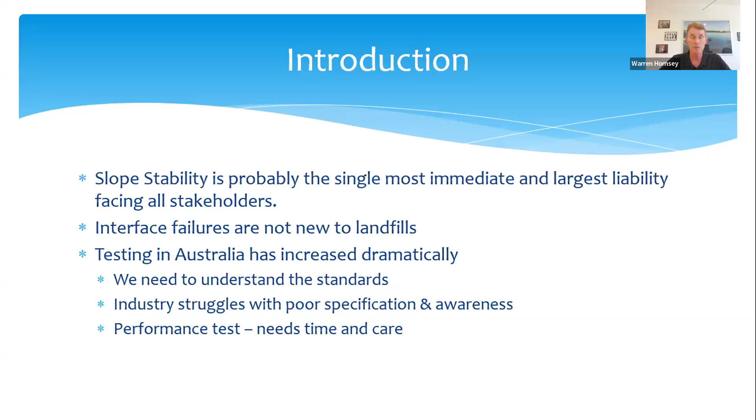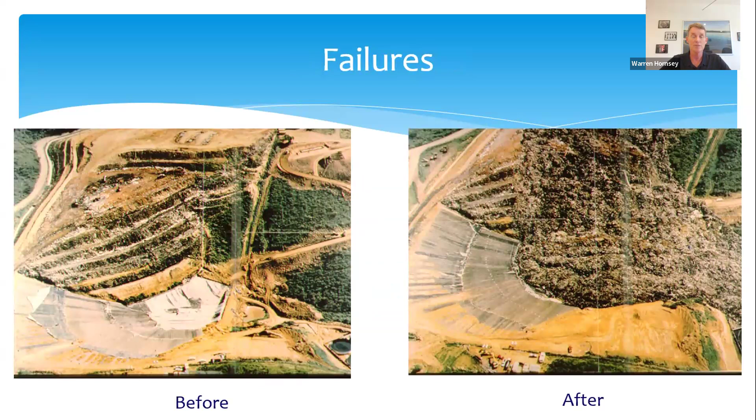So, talking about landfill failures, this is kind of the dramatic outcome that nobody really wants to see - these slips either through the waste onto your cell, or in this case of different components within the liner system sliding down the slope.

Like I said, this is nothing new, and I was actually out on a site on Tuesday having a look at a similar failure that occurred in the Brisbane area. So it continues despite us doing lots of testing.

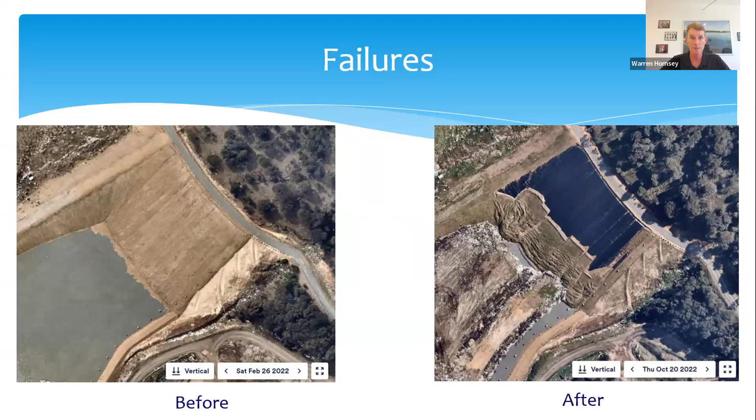So what do we need for this sort of testing? Essentially, for geosynthetic testing, you need large shear boxes - 300 by 300 millimeter shear boxes, not your 75 or 50 millimeter shear boxes that you use for soil testing. These are specialized pieces of equipment with special adaptations that go beyond what a normal soil testing apparatus would do.

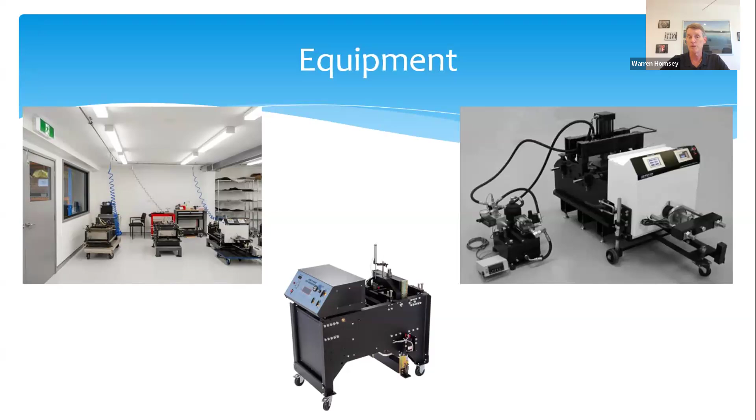And because of the large area, we're talking about large loads, and those loads are applied either through hydraulic rams or applied by air pressure. So it really depends on what equipment you've got.

Essentially what we're doing is applying a normal load or a vertical load on the specimen, and then applying a horizontal shear stress. From that, we can work out what the friction angle is and get an indication of the forces that are involved in or transferred through these materials as you fill up or build the landfill.

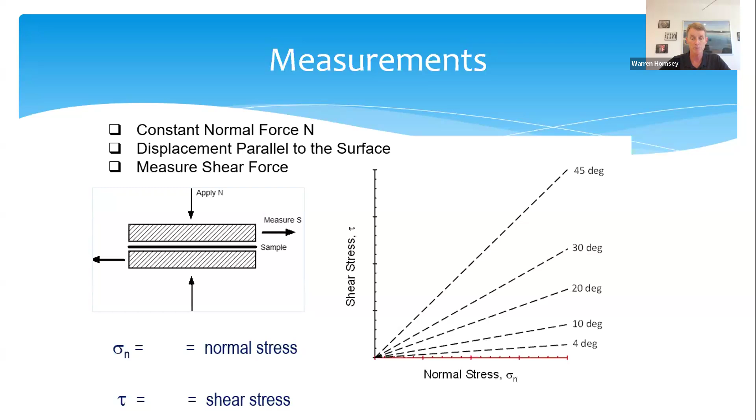So what we're going to go through today is the 3 key standards involved in interface friction testing with geosynthetics. First is ASTM D7702, which is really a guide on what you should be considering when doing interface friction testing. If you're a designer, you really should get a copy of this standard, go through it, read it, and make sure you understand what it's all about.

There's a lot of information in there, and while some of it may not be useful for you, there is a lot of information that can be really helpful. I'll go through a few key aspects of that today.

The next one is ASTM D5321, which is for doing geosynthetics versus soils, or geosynthetics versus geosynthetics. Then there's ASTM D6243, which is essentially the same as 5321, however it works mainly with, well, it is for GCL specific interfaces.

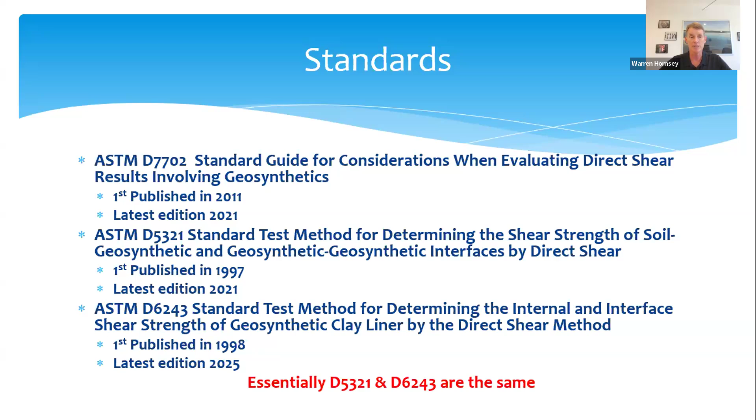So whenever there's a geosynthetic clay liner involved in interface friction, a GCL involved in the shear profile, then you should be using 6243. The standards themselves are very similar, as you'll see - it really is just some of the setup details that are different in 6243.

In terms of D7702, the standard - well it's not really a standard, it's just a guidance document. When we say standard, it means it's been approved through the ASTM process. It's a summary of information that was available at the time of publication. It's intended to assist designers, and it's not intended to replace educational experience.

And these are all the disclaimers associated with the standard itself. One of the key areas references a few people within that standard: Thiel, Gilbert, Koerner, and Stark, and there's some documents and correspondence I have with those people that I'm going to show later on when we go through a case study.

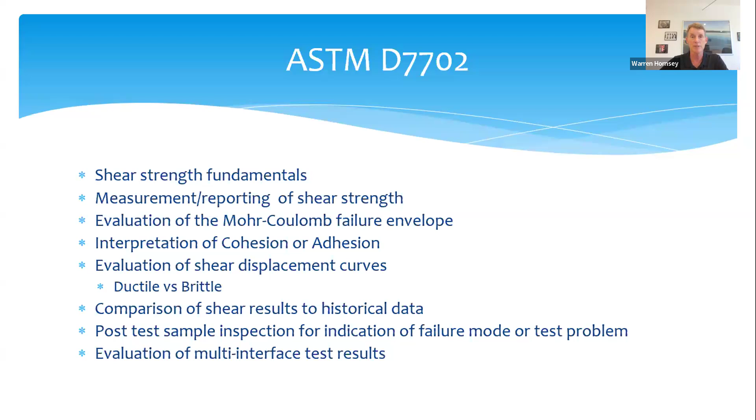So it goes through what the shear strength fundamentals are, evaluation of Mohr-Coulomb envelopes, comparing shear results with historical data, and evaluating multi-interface test results. All of these sorts of things are covered in D7702.

Like I said, it's a very useful standard, and I would recommend everybody that's getting involved in shear testing get a copy of that standard.

The next one is ASTM D5321, which is the testing method - this goes down to how you should test these materials. And I spoke about the 300 millimeter shear boxes - these are the requirements of the standard.

Within that, they talk about shear displacement rates, displacement indicators showing that you need at least 75 mils of shear when testing, and how you clamp those materials in place to make sure they're forced to shear along the interface you want it to shear, not that it shears on the gripping plates along the way.

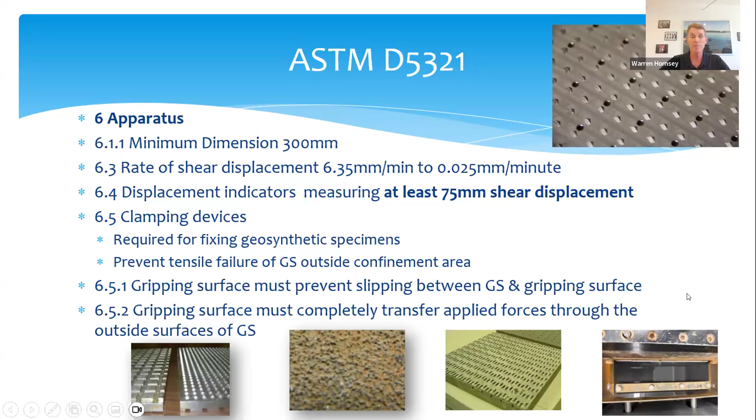And then over here is just the clamping devices for the geosynthetics themselves, while gripped underneath here is a secondary clamping to hold the samples in position. So the standard talks about them, but doesn't give you guidance on what you should be using.

Again, in terms of conditioning, the standard talks about being aware of the conditioning of your samples. It talks about the time those samples should condition, but it doesn't give you any guidance. It doesn't tell you to do it 1 hour, 24 hours, 48 hours. Those are engineer specific or site specific.

The same with confining pressures and normal stresses and shear rates. It doesn't give you too much information on it because each one of those things is project specific, and design engineers really need to think about what they should be doing.

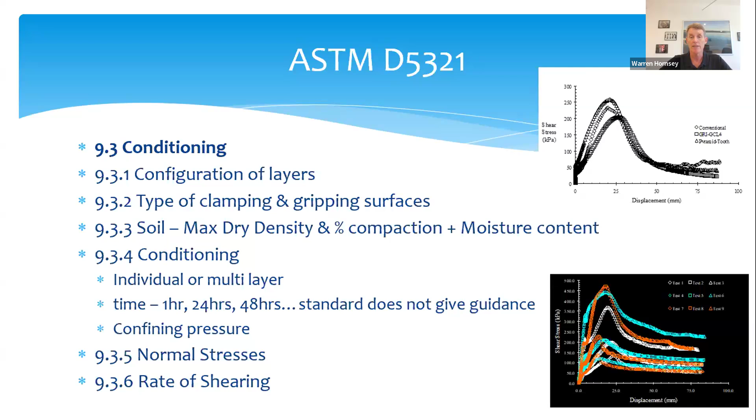So in terms of normal stresses, I see this quite often. We see capping designs with 200 kPa confining pressures being specified and things like that, which is really unrealistic for a capping design. So from a design engineer perspective, you really need to think about what your loads are that you're going to be applying during construction and how that will affect your interface friction testing.

So there's procedures that you would follow if you were doing geosynthetic versus geosynthetic, say a geocomposite against a geomembrane. They talk about how you'd assemble the layers and so on.

Now, in terms of applying the shear speed or shear force, if there's no instructions, the standard says 5 millimeters per minute. Well, in all reality, I haven't seen any shear being carried out at 5 millimeters per minute here in Australia. Having said that, in the US, it seems to be the norm with, say, a geomembrane versus geocomposite or a geotextile versus a geomembrane, those sort of things. So that's where that becomes interesting. But in Australia, we don't see anything faster than 1 millimeter per minute, and I think the small gain you get from running at 5 millimeters per minute is negligible.

The standard requires you to run to 75 millimeters. However, there's a note that allows you to stop the test once steady state is achieved, and I'll go into that again because it's quite important. I've gone into this in a bit of detail at the end of the presentation in the case study.

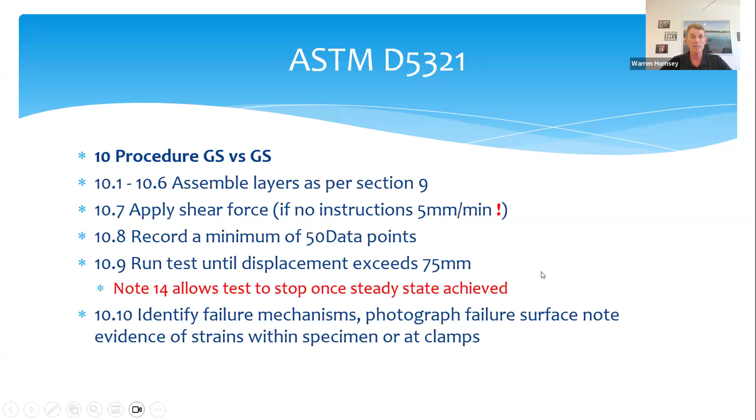And then there's requirements of identifying failure mechanisms, photographs of failure surfaces and so on, and whether the failures happen within the specimen or at the clamps and so on. So it's quite detailed in terms of what is required or what should be reported.

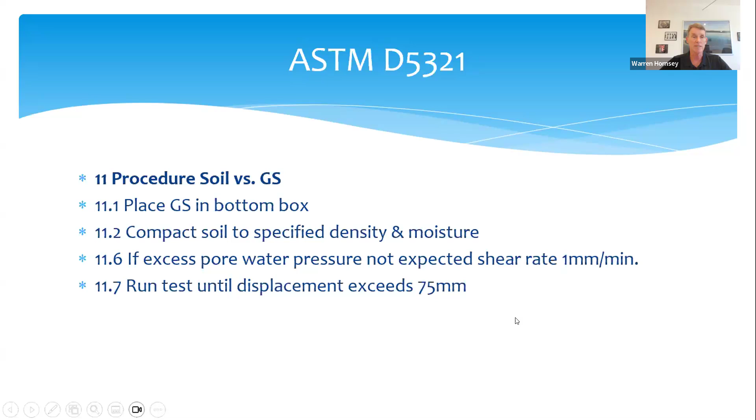Now, much of these procedures are very similar, other than, say, soils, where you have to know what the compaction of your soil is, and what the density and moisture content is going to be. And then there's some guidance in terms of what the excess pore water pressure, what speed you should run on.

In terms of reporting, it's really detailed in terms of what should be reported and what you should be expecting when you see results come in from the shear testing. It really needs description of the specimen. So if you're using grade X GCL, you need to describe what the grade of geotextile or GCL it is, because that grade could have an effect on the outcomes of your testing.

So if you look at this graph over here, you can see this is a GCL against the geomembrane, and in this case, we're getting internal failure of the GCL. And this may not happen if you have a different grade GCL.

So it's really important, these are standard requirements of what's required in the standard in terms of plots of shear force versus displacement, shear stress versus normal loads, standard sort of tests, but are not always provided to clients for them to assess.

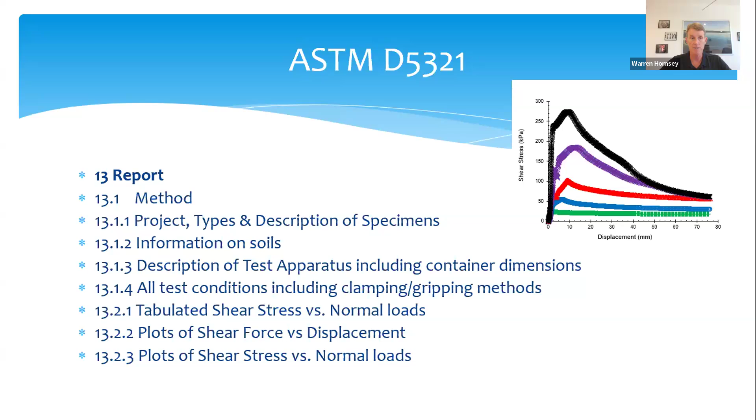So in terms of what the laboratory should be supplying you is the friction angle that you would expect out of those materials, secant friction angle, so the angle is if you took the line through zero cohesion, and then the mode of failure.

You don't always get this from a lab unless you ask for photographs, but the lab should be taking photographs of all their interfaces.

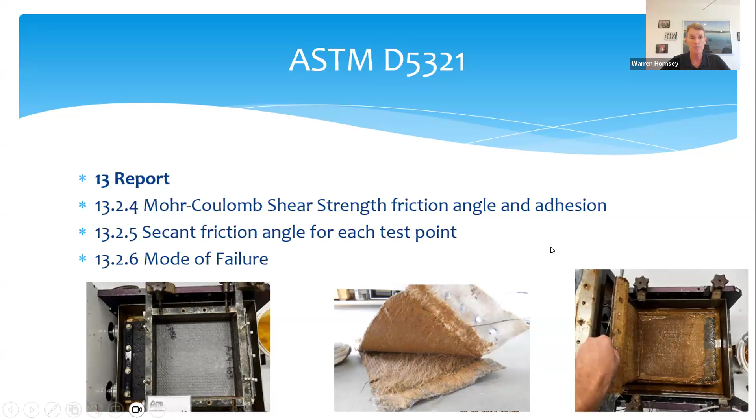So next one is 6243. Again, same sort of setup, same machines. But here we're talking about displacement rates of between 6.35 millimeters per minute down to 0.025 millimeter per minute shears.

And that really has to do with whether excess pore water pressure is building up in the specimens during the shearing.

The key again is preventing tensile failure of the geosynthetic outside of the confinement area. So we confine it within a 300 by 300 millimeter area, and that's where you want the failure to happen. You don't want the geomembrane going into tension around the clamps on the outside of the sample.

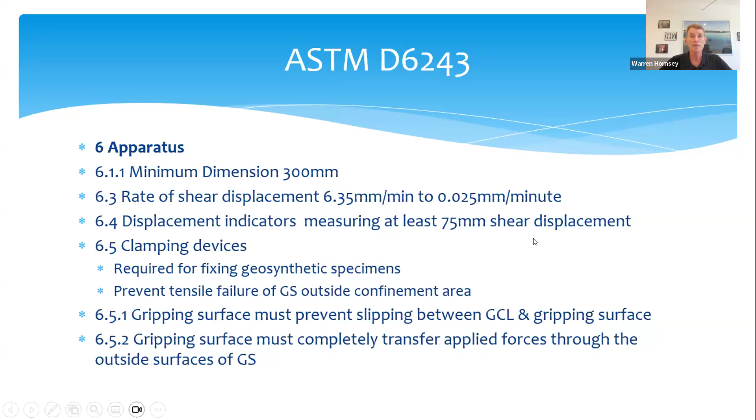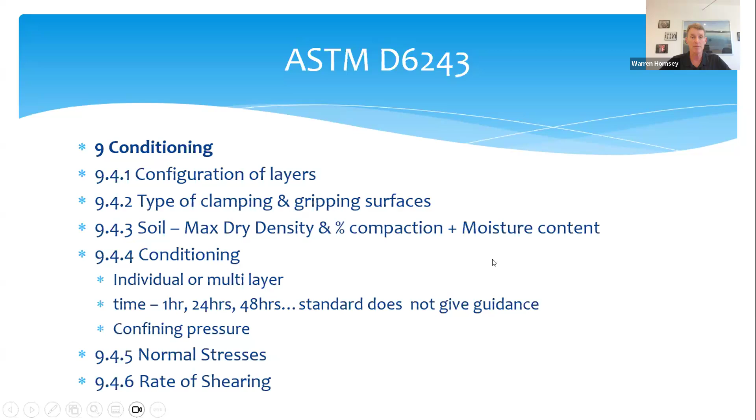Again, it's much the same as the 5321, same setup in terms of conditioning, although once again there's no guidance, just saying you have to consider this, and define what that requirement is for your testing facility.

This standard goes a little bit more into detail in terms of applying the shear force. They're talking about 1 millimeter per minute for interface shear strength and 0.1 for internal shear strength.

Now, I don't really agree with that, to be honest. If you're going at 0.1 millimeter per minute for internal shear, you should apply the same thought process to the interface friction testing. I think you'd struggle to justify running a GCL against another interface, say a geomembrane, where you can't release pore water pressures, at 1 millimeter per minute when testing.

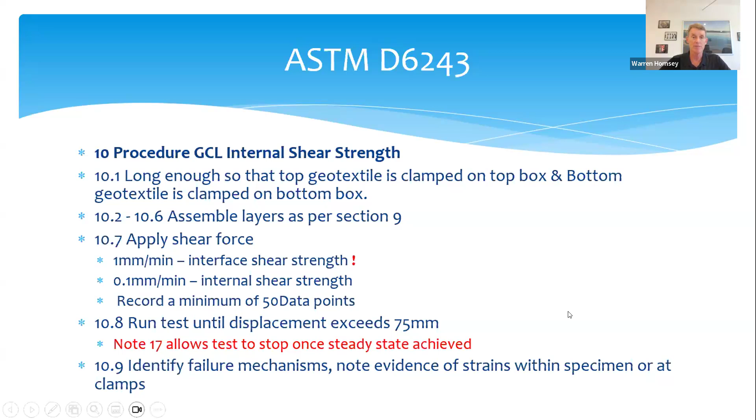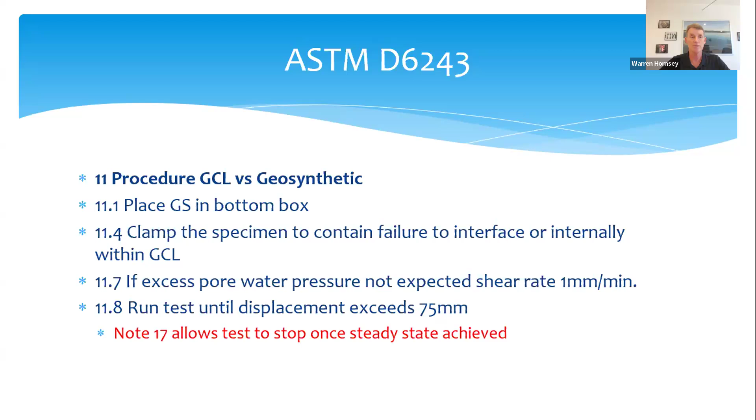But again, it shows the failure mechanisms and so on along the way. They talk about the different interfaces, so the procedures in terms of setting up the GCL versus geosynthetics and so on. There's a little bit of detail in terms of how that should be set up.

And this is something you should be transferring over to your laboratory that's doing the test. There's details. So if you're doing GCLs versus soil, and you place the GCL in the bottom box, that's okay if your GCL is not prehydrated.

But the moment you prehydrate your GCL, and we see this regularly, the GCL becomes very plastic, or the clay within it becomes very plastic, almost turning into a toothpaste where you can squeeze it between your fingers. So if you compact on that, you could be squeezing all the clay out of the GCL, and then you're not testing the true performance of the GCL. So you have to be careful of that.

So while the standard gives guidance, think about what you're doing in terms of the way it's going to be set up and so on.

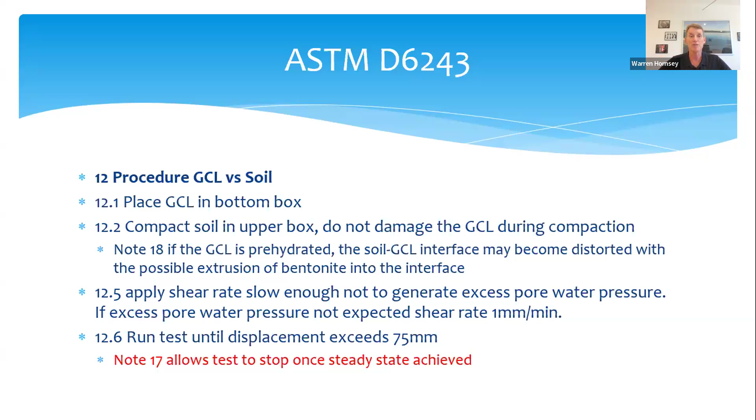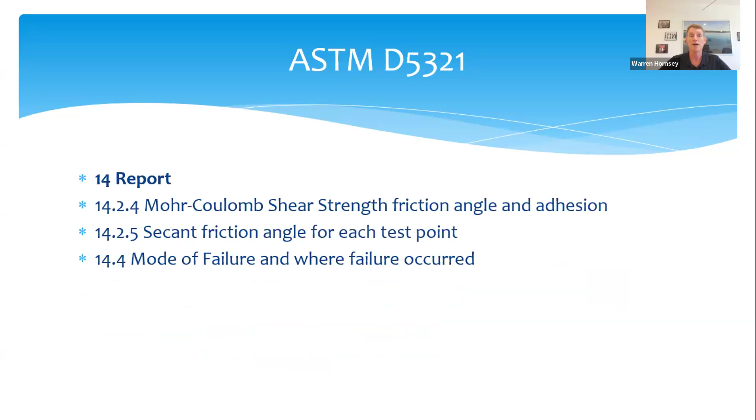The reporting is exactly the same as 5321. There's no difference, they're really asking for the same processes. So I haven't added more photos into these things because it really is the same.

What the standard does have is a checklist in terms of what you should be supplying to your laboratory for testing purposes. So I'd say you should get a copy of each of those standards, and when you set up your test requests, at least confirm you're ticking off this checklist in terms of what needs to be done for the testing.

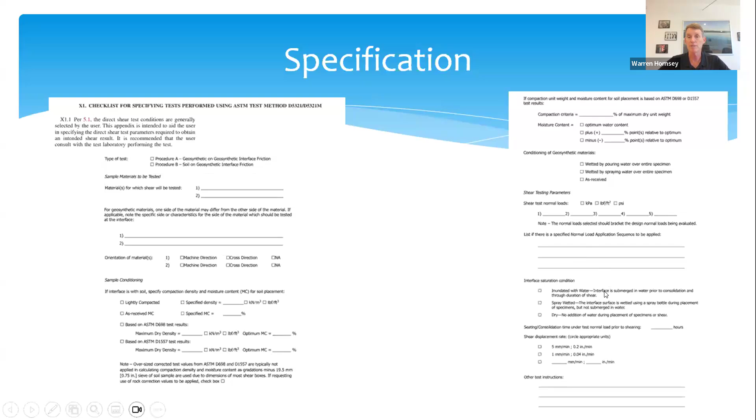So your specification should be covering all these items that are listed in the standard. The specification is the design engineer's responsibility, and really the setup of the test program should be the designer's responsibility.

Don't leave it up to the CQA person on site to make that call. While it might be them that has to see if it passes or fails, they should not be the ones deciding how those materials are set up in the test.

And you really need a justification if you deviate from the standard, particularly if things go wrong. When things go wrong and material starts sliding down the hill, if you deviated from what the standard says, you need to have some sort of justification as to why that would be.

Because from my experience, when lawyers get a hold of something and get involved in projects like this, it doesn't matter whether it's right or wrong. It's whether you followed the standard or not. And if you haven't justified why you deviated from the standard, then you've almost assumed responsibility, or certainly co-responsibility, for any sort of failure that is out there.

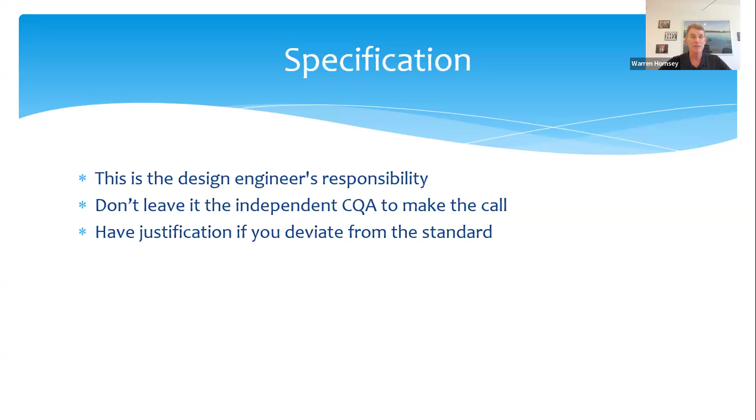So in terms of specification and testing, number one, make sure the laboratory is testing the correct material. It's no good asking the laboratory if they've got some clays that they think will suit your site.

That's extremely dangerous. Clays are so variable, and we see big differences in plasticity index and particle size distribution of some of these clays. Some of them have sandy materials in them - the materials out of WA have a lot of sand in them, whereas some of the sites we see around Melbourne and so on are highly plastic, very fine, very slippery clays. So substituting clays is extremely dangerous.

Geomembranes - we all like to think all geomembranes are the same, but there is a difference between blown film and flat die textured geomembranes.

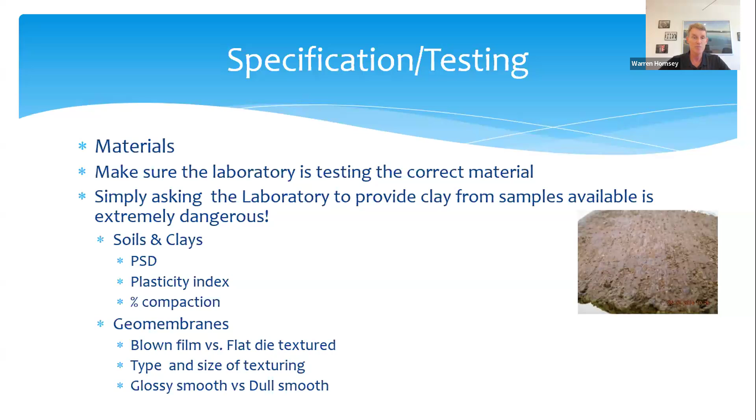When we talk about textured geomembranes, it gets even more complex because we have blown film, spray textured, which I haven't got a photograph of, and flat die texturing, with the little indents or bumps on the geomembrane changing shape, size, and spacing. All of those characteristics will influence your shear results.

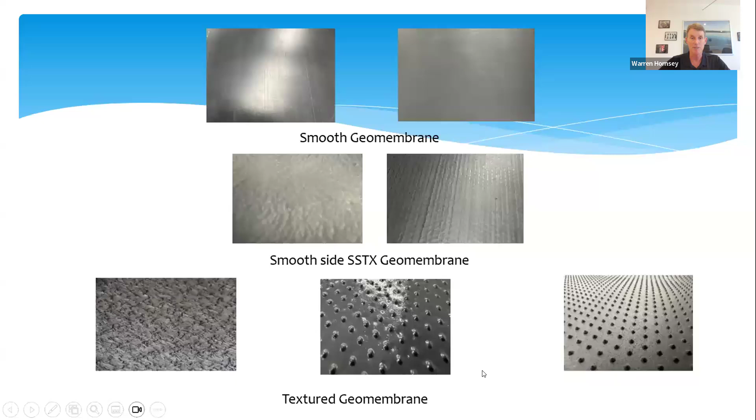So if you plan on using a certain material, don't substitute somebody else's material just because it's easy to get hold of. In terms of GCLs, clay impregnation of the upper geotextile, the one facing whatever you're shearing, can have an impact.

Heat setting of the GCL - is it heat set, and how well is it heat set?

Peel strength of the GCLs absolutely makes a difference to the peak shear values you get under high confining pressures - not so important under low confining pressures, but certainly under high confining pressures. The peel strength of that GCL will influence the friction angles you get out of the system. And then any coatings you may or may not have on that GCL.

We did a job a few years ago in Papua New Guinea where a plastic coating was placed on, attached to the GCL. It was probably a bit of a slip of the tongue, but in my opinion it was placed on the GCL rather than attached to the GCL.

So the failure plane became the coating, or the attachment of the coating to the GCL. Be aware of those sort of things.

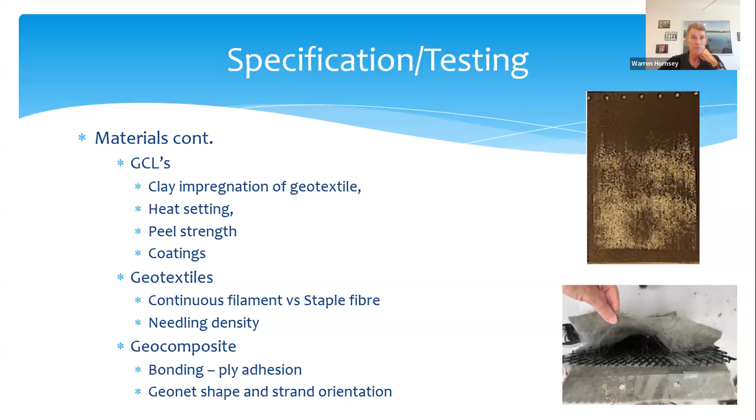Because if you leave the area that goes up into the clamped areas bonded, the tensile strength within that area can influence the shear results and overstate your shear values, because you're putting tension into the whole structure. So we'd always recommend that only the area under the confining pressure is bonded.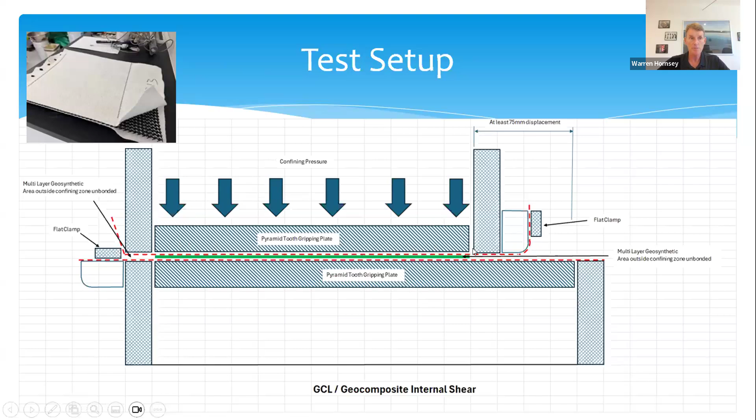The same goes when we're going GCL or geocomposite against a geomembrane, that we would peel back the composite section so that only the section that's under confinement is bonded and the rest is free to shear.

The geomembrane is clamped at the back, and the GCL, the top geotextile of the GCL, is clamped in the front. You can see the clamp there, sitting through there to hold the sample in position. So these are the sort of things that you have to think about when you're doing your test requests that you send through to the laboratories, because they can have an influence on the outcomes.

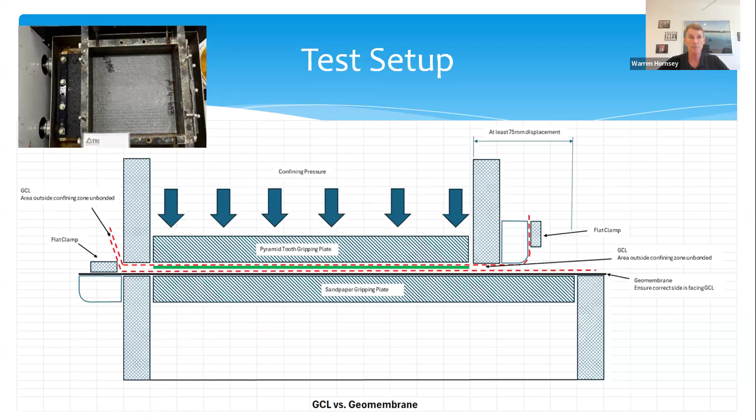One of the key areas that I see in this, we're seeing more and more geogrids being included into particularly veneer stability, landfill cap designs. And often we see there is no clamping of the geogrid in the layer work, so the geogrid is free to slide along with the material.

The problem with that is that you are not really measuring that shear force. You're not measuring the real forces that are going into your geogrid, and you could be underestimating your forces. Why that's a problem is that you can underestimate the anchorage required for your geogrid, and you could have pull-out failure of your geogrid, and the whole structure could slide down the slope because of that.

So think carefully when you're doing these geogrid inclusions in terms of what is happening on site and how that interaction is going to happen. It's no good having a geogrid floating in the shear box if it's not floating on site. If it's anchored in a trench and it's designed to be a reinforcement, it should be anchored in the shear box to replicate the same thing happening there.

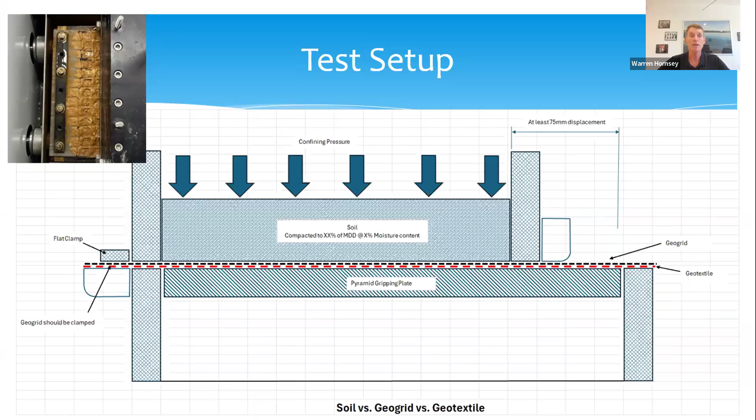In terms of testing, you've got to think about what the hydration requirements are that you're having, and these are typical hydration periods that we see. I'd say that's probably not 96 hours - it's not typical, but we have done testing, hydration or consolidation for 96 hours.

Step loading, we see in some applications, but you need to be aware that this adds time to the testing. And then once you've done step loading, do you shear immediately afterwards, after you've reached the 500, say, kPa, or do you hold it for a period of time - 16 hours, 24 hours, whatever it is.

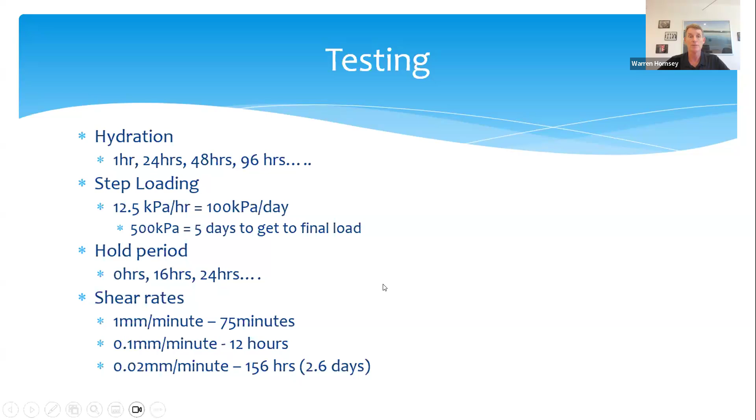In terms of your shear rates, what are you specifying and how quickly can these tests be turned around? So 1 millimeter per minute is 75 minutes, just over an hour for a test. 0.1 millimeter per minute, that's 12 hours of shearing. 0.02 millimeters per minute, you're talking about 2.6 days of shearing to get that. So just be aware of that.

This is an example of a project that I'm quoting right now. You can see that we've got 3 confining pressures. We have to have 48 hours of hydration, step loading at 12.5 kPa an hour and 0.1 millimeter per minute, and we have to do that 3 times. So essentially, we will have 1 shear box tied up for almost 3 months doing something like this. That's fine, we can do it, but there's no way of speeding these tests up - then you're waiting 3 months for results.

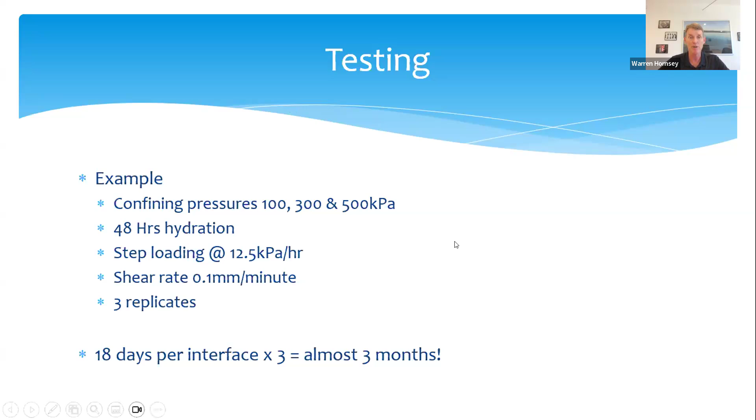In terms of understanding the results, what you should be getting as per the standards are what the specimen is, what the normal load is, or normal stress that you've applied to the specimen - so 50, 100 to 320 kPa - the shear stress, the peak shear stress that was recorded, the large displacement shear stresses that are recorded, and then we're looking at the friction angle, for both peak friction angle and the large displacement friction angle. So that's what you should be seeing in a report, at the very least.

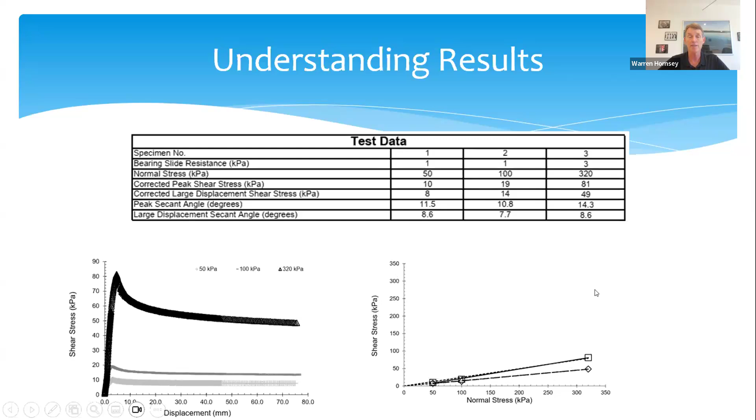It's important that you as design engineers or CQAs understand that all these materials have a fingerprint, for want of a better word, in terms of how they would behave, depending on what materials are being sheared, whether it's smooth geomembrane against geotextile or textured geomembrane against GCL and so on.

One thing's really important to understand is that all of these materials need some movement between them in order to take up that force - it's not an instantaneous force transfer. Smooth geomembrane is probably the only thing that's instantaneous because the forces are so low and there's no gripping or interlock required between anything. But as soon as you use textured geomembranes, it takes a while for those materials in contact with the textured geomembrane to lock into that texturing and then take up some sort of tensile force within that application.

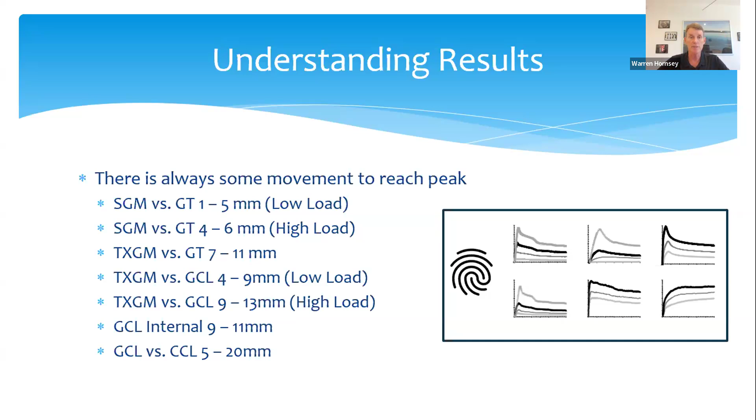So when you're getting results, have a look at them and say, does that look reasonable for a textured geomembrane against a GCL or whatever the case may be? We can certainly give you some guidance on that, and there are some examples that can be shown for those sort of materials.

Things like internal shearing of GCLs or geosynthetics - GCLs, if fully hydrated, will normally fail internally at confining pressures greater than 150 kPa. It depends on the grade, but at low confining pressure of 100 kPa, the GCL shears against the textured geomembrane, giving reasonably high large displacement shear stress. At 300 kPa we get a peak, but at this peak the GCL has failed internally, so at large displacement it's much lower than what we saw at 100 kPa.

The same goes for 500 kPa. If we continue these shear stresses out to 300 millimeters, these numbers would converge, and you get essentially the friction angle of a sodium bentonite, which is anywhere between 3 and 4 degrees - very small.

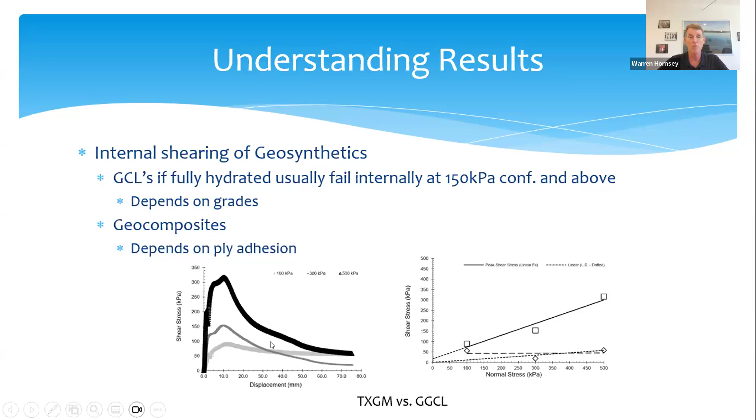In this case, with the shear stress at higher confining pressures being less, what we get is a negative slope, which can't be real - that's just a theoretical number. We would force the tangent through zero so that you've got a more realistic large displacement friction angle. Your laboratory should be telling you that's what they've done when testing, and you should be checking that this is occurring along the way.

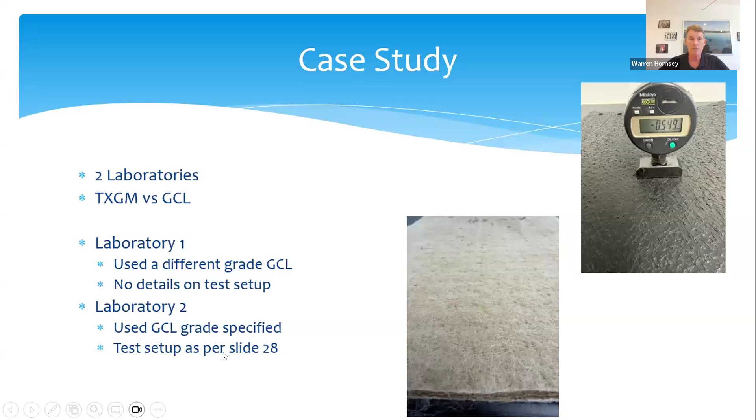As a final test - and I'm running a bit over time - there's a quick case study. Two laboratories carried out testing on the textured geomembrane versus the GCL. Laboratory 1 used a different grade of GCL: grade X was specified, but they used grade Y for testing. Laboratory 2 used the GCL as specified, set up as per slide 28 - you can go back and look at that. What you see here is the differences in the shear stress versus displacement.

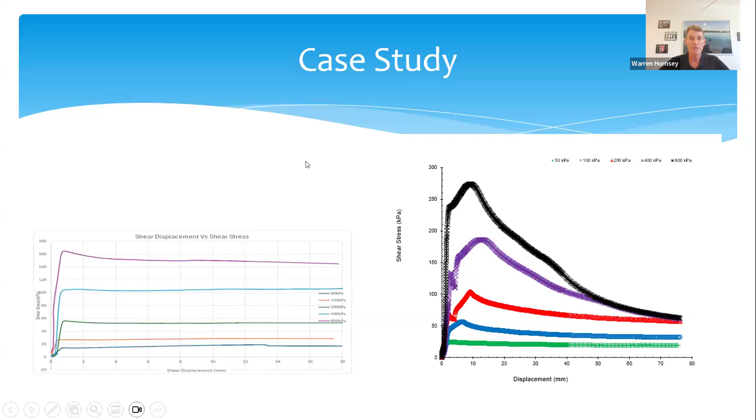With laboratory 1, at 600 kPa we're getting just over 160 kPa shear stress, whereas laboratory 2 is getting up to 270 kPa shear stress for supposedly the same interfaces. That set off alarm bells with the design engineer, hence the comparison that was carried out.

What you can see is that the lab 1 stress-displacement curve looks a lot like a smooth geomembrane versus geotextile - not quite, but pretty close. The displacement was only 18 millimeters, and there was no internal failure above 150 kPa, so there's some questions over how the material was clamped and so on.

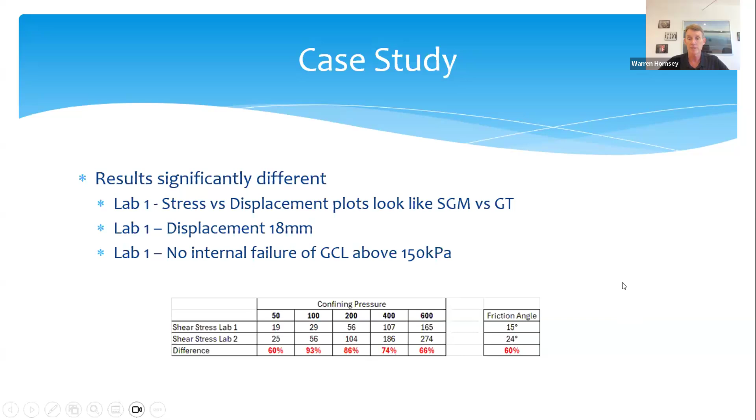In terms of the differences, the shear stresses for each of the confining pressures show up to 93% difference - a huge difference in the results - and in friction angle, around 60% difference.

We can drill into that even more and look at why that was stopped at 18 millimeters. As I highlighted in the previous presentation, this test may be stopped sooner if the shear forces have reached steady state - that's in both standards - but there's no definition in the standard of what is classified as steady state.

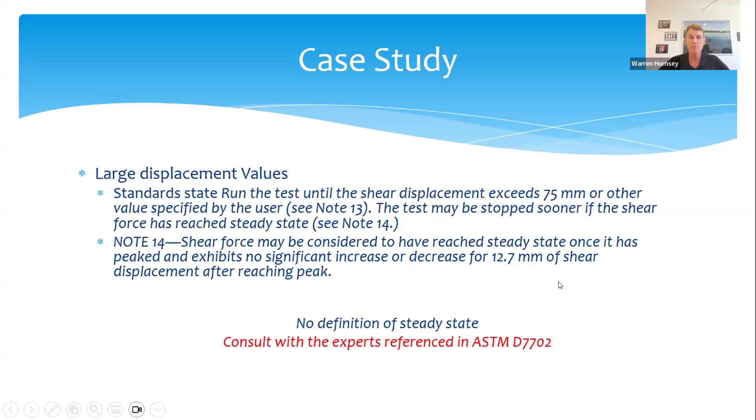So I went and spoke to the experts listed in D7702 - George Koerner, Rick Theil, and Tim Stark - with a number of questions regarding this 75 mil large displacement shear stress, basically asking whether 75 millimeters is reasonable. Both George Koerner and Rick Theil said that's essentially industry practice and what is used - that's acceptable.

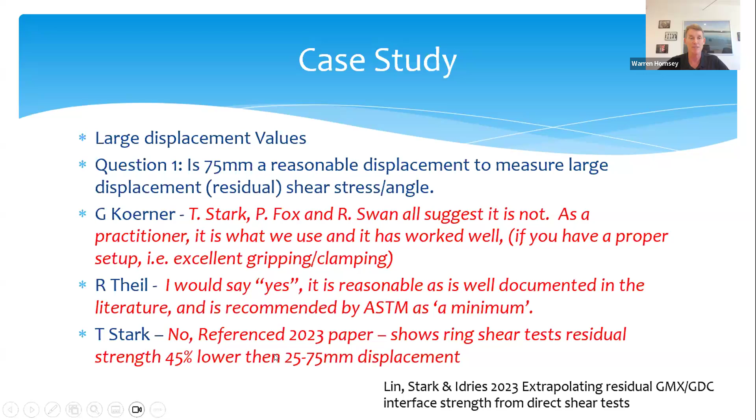Tim Stark, on the other hand, said absolutely not - you should be using ring shears, where you can get much lower residual strengths, around 45% lower than the 25 to 75 mil displacement.

The next question was, what is the end criteria if you want to stop shear testing early? Both George Koerner and Rick Theil gave insights on how they would see it, but again it's very much up to the end user at the time to make a call on where they'd land in terms of accepting or not accepting that difference.

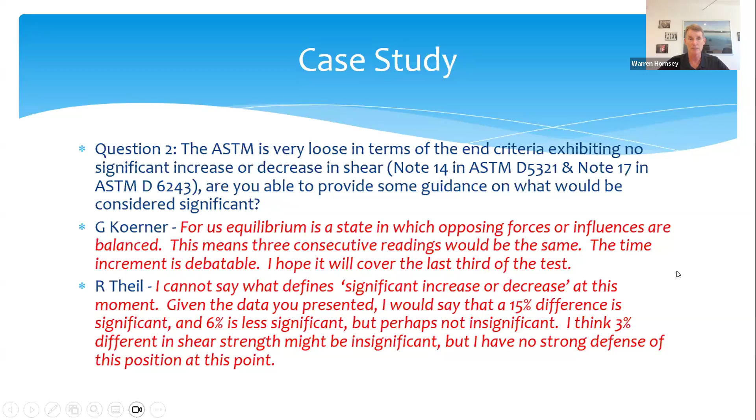The third question was, if you were running a test, would you leave it up to the laboratory to decide when they stop? George Koerner said no way would he ever stop a test early - there's no value for the small amount of cost savings you get, and no engineering value in stopping it sooner.

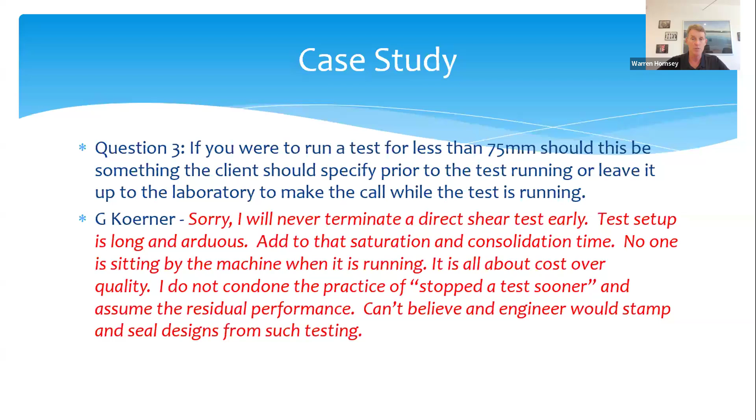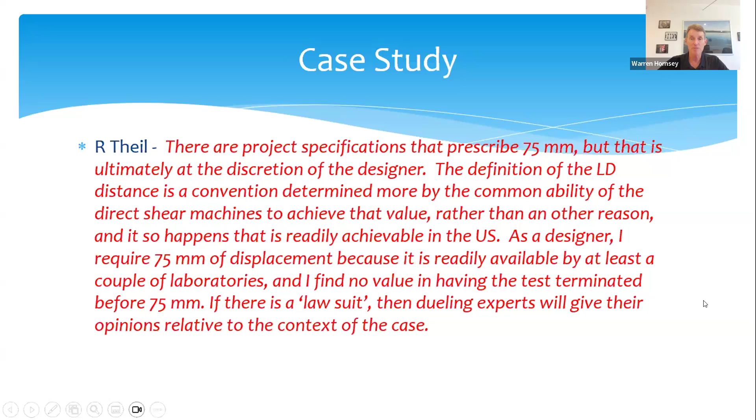Rick Theil was saying that normally the project should require 75 millimeters, and that's what's readily available. But he can't find a reason to stop it before 75 millimeters, and that if there was a lawsuit, it would come down to experts deciding on which is the right way to go.

So nobody's really willing to give their full opinion on that side of it. What I did was go and look at a number of cases where I examined whether terminating early made a difference to residual or large displacement shear stresses. The shorter you make the test, the sooner you stop it, the greater the difference between shear values. So 50 millimeters displacement versus 75 millimeters, 26% difference. 60 millimeters versus 75 millimeters, about 10% difference. So it does have an influence, and as an engineer, you have to make the call whether you're going to accept those lower shear values along the way.

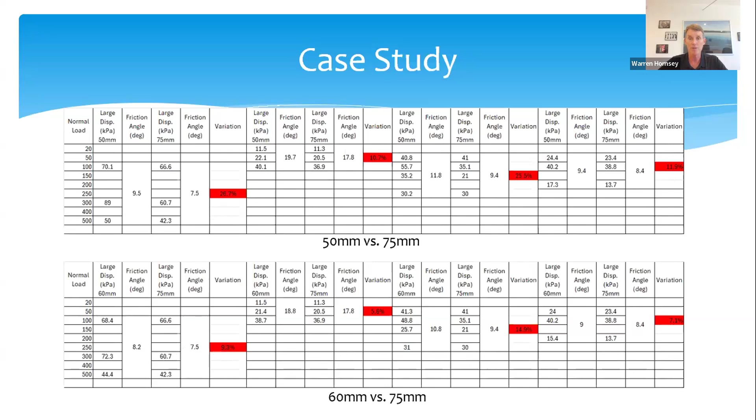So to finish off the test, shear testing is about as close to a performance test as we get in Geosynthetics. So it's really important that you set up the test as close to what you think is going to happen in the field as possible, because the setup has an impact on the test results. These are not quick tests, and some of them will take months.

I understand people want to do replicate tests and so on, but be aware those are time-consuming tests, and you are going to wait for those results. Designers and specifiers need to understand what they're asking for. Go back, read the standards, make sure you're familiar with what the laboratory is testing and what you want out of those results, and make sure the lab understands that before they do the testing so they can give you the right answers.

And then lastly, with all of this testing that we do, laboratories make mistakes. So don't be afraid to ask for clarification if things don't look right, or if you see something unusual and don't understand why a stress curve looks unusual. As designers, engineers and end users, you have every right to ask the laboratory for clarification on this. I recommend that you do. If you see something unusual, go back and ask the lab to clarify. Labs make mistakes, so it could be that they've set something up wrong and have to rerun tests. That's the end of my presentation. Hopefully I haven't bored everybody to death.